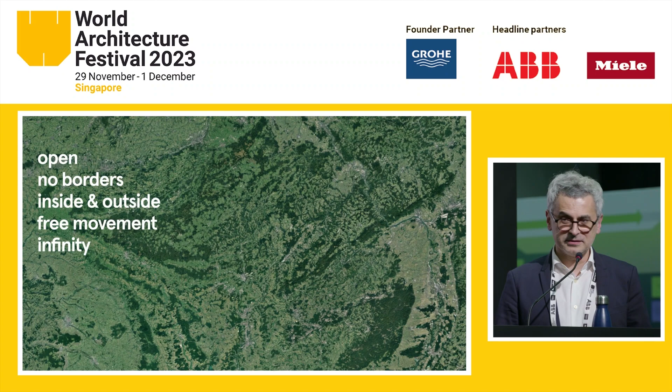And first, I wanted to speak about our little country, Luxembourg. There are no borders, there is no inside, outside, and there is a total freedom of movement. So that means that for our little architectural culture, there is no real identity or architectural identity. So the role of the architect is pretty complicated in Luxembourg, where we have to fight every time to explain the situation.

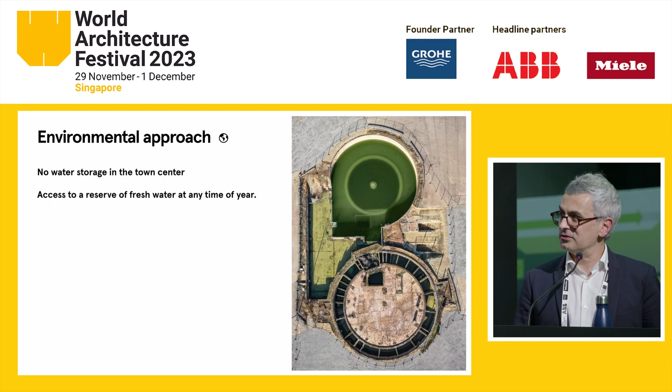So this competition was generated by the state of Luxembourg, and the idea was to think about a public square where we have in the middle of this future square an old infrastructural installation. And the aim was to get rid of this installation because nobody wants that. It's dangerous, it's a lot of concrete everywhere, and just think about how we can get rid of it.

And what we tried to do was completely the reverse. Say, okay, we have an interesting infrastructure, which is a part of our industrial heritage, and what if we keep it as it is and we build the square around this installation?

So with that solution, actually, we found out there are more than 5,000 cubic meters of concrete that we had to demolish first with a huge effort, and then to build another installation, maybe after 20 years, was not convenient anymore. And that's, again, the situation we are living every day as architects. So why not keep the existing and reuse it and give a new face and new life to the existing infrastructure?

So we put some huge pumps inside to get rid of water, because with our engineers we wanted to test the statical approach of the existing concrete, if it can work or not. And fortunately, everything was in very good shape, because it had been underwater for decades with no contact with oxygen, and everything is in super good shape.

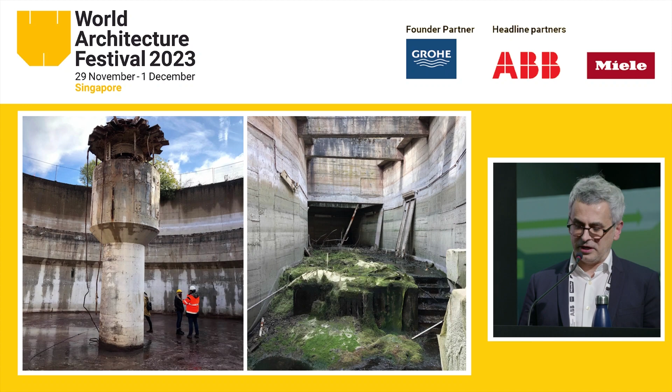So with that solution, we propose to keep the infrastructure as it is and to provide different layers regarding the needs of today. Maybe tomorrow we will change these layers and put new layers on, or put additional layers on the existing one. And we have a ramp which represents infinity. We have a restaurant, we have vegetation. Tomorrow maybe we would have another thing. But that was regarding the program of this competition, and that's the layers we proposed.

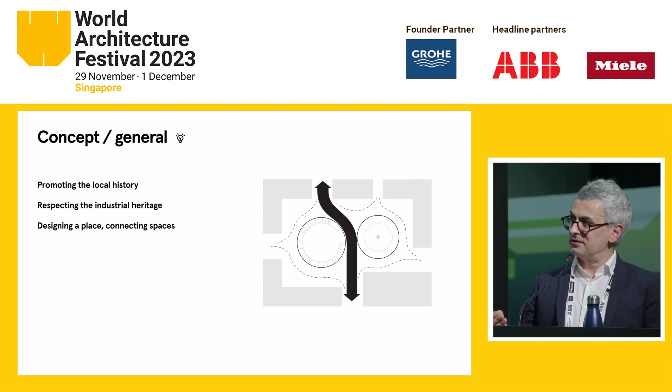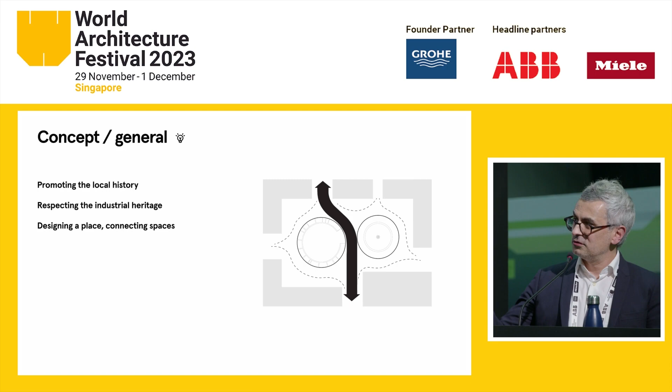So the square works actually very well with the flow and with the surrounding buildings. There is an interesting interaction. The visitors become actors, actually, while going up and down the ramp. And there is a democratic square, public square, where people can play music, where a child can play without taking any risk with the cars, because there is a difference of levels. And firefighters and deliveries have all access around these cylinders to the shops and to the apartments.

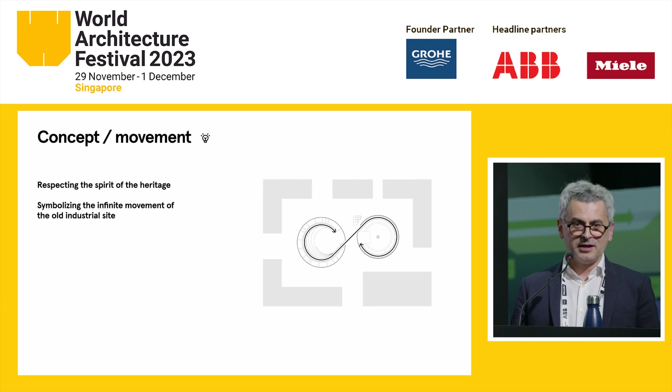And the coincidence was the ramp we proposed is exactly 200 meters long. That means if you are in the middle and your child is just running up and down, after 5 times you know that he ran 1 kilometer. So that was a coincidence.

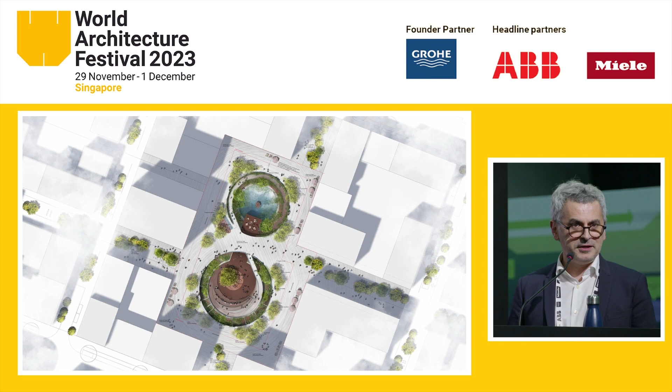We worked also with partners, landscape architects, to provide pioneer plantations, which are completely adapted to the topography and to the natural light. And this is how it should look in the 2 coming years. We already finished the stabilization works and stopped the site now because we are waiting until all surrounding buildings are finished. And once everything is finished, we come back to finish the square and the restaurant.

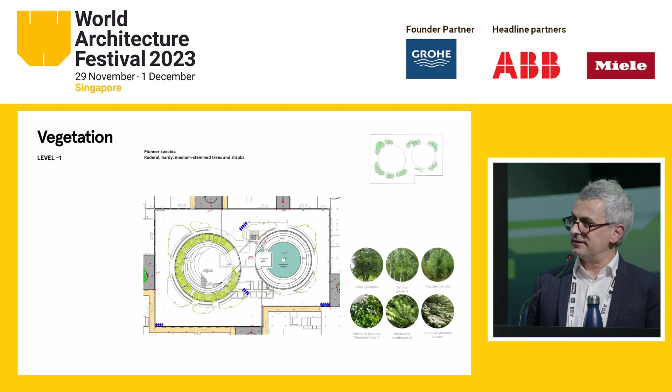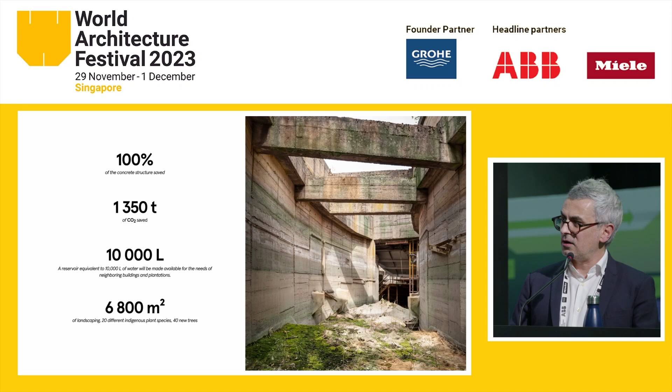So these are the different levels of plantation and different types. And there is a small mistake here. It's not 10,000 liters, but 10,000 cubic meters of water, which is a natural reservoir of natural water that we can use every day of the year for vegetation and also for the surrounding buildings.

So this is the final outcome. And there is also a little restaurant underneath because we didn't want to create any pavilion on the surface, because the surface is already saturated with a lot of information. And that's going to be a place to be in the south of Luxembourg.

And I don't know how to play the movie.

Yeah, this is the state now. We just finished the infrastructure for reinforcement of the structure and raising the level by 3 meters. And as you can see, there is always water there. And all around will be offices and housing buildings.

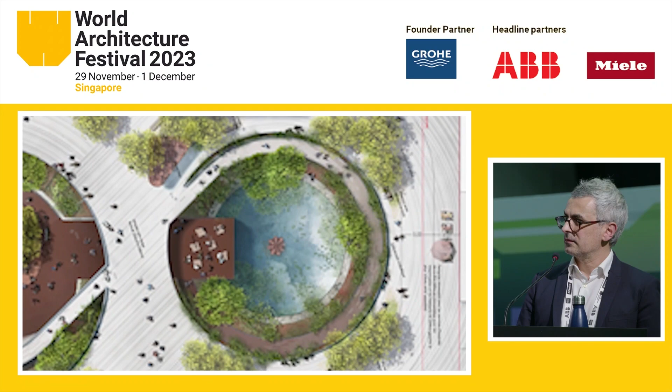And we're going to move on to our next category now, which is carbon and climate. And I'd like to ask Design and More to come and tell us about their winning project. Hi.

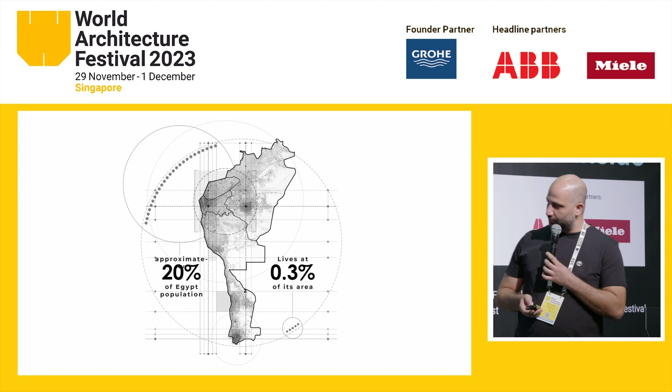So it started with the idea of really understanding the problem that most dense cities are facing, which comes from uncontrolled urban expansion. As you see here in Egypt, almost 20% of the population lives on 0.3% of the land, which makes some of the cities, like the big capital Cairo, very dense. But most importantly, you can see how the urban expansion into the green territory is affecting the context there. And this resulted from too much demand for buildings to accommodate more users.

I think the infrastructure is taking over the city. So this is one piece. It was 2014, now even the green areas have been replaced with infrastructure, mostly bridges and roads. The larger the city is, the greater the problem that we face. This is not only about Cairo. You can find it in Mumbai, in Mexico City, and everywhere. This happens when uncontrolled urbanity happens, and the cities become like a concrete jungle. And the city is even growing to eat the traditional area. There is no protection or border between the old city and the new city.

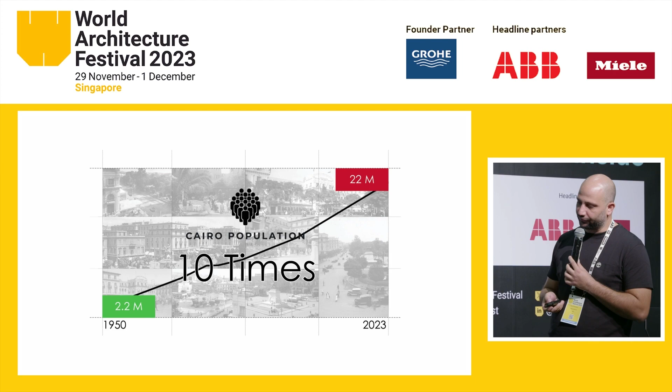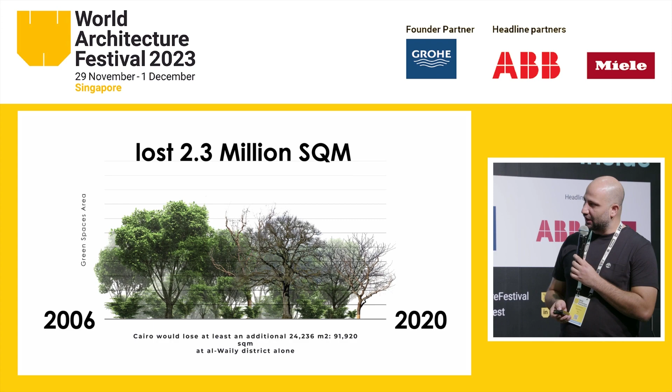However, this is another photo from the informal settlements in Cairo. And you can see here the percentage of greenery per person is getting less and less. And the city expands to become 10 times the population. And this is what the ending scenario will be: 1 tree for almost 50 or 100 citizens. All of these issues are not new, but I think we as architects should have a voice and try to use our voice and profession to reflect on these critical issues. But one of the sad situations is that only in the last 3 years, the amount of greenery removed was really big damage. And this affects the quality of life in such a city.

So learning from the informality, because I believe inside the informality there is an order, a hidden order we can learn from. And this is the self-organization, how the people really start to have this kind of awareness. They are planting the rooftops and cropping the plants, trying to be self-sufficient in a way. And also you can see on the skyline these kinds of towers the people constructed by themselves. So it was a real inspiration for how we can bring some greenery to the city.

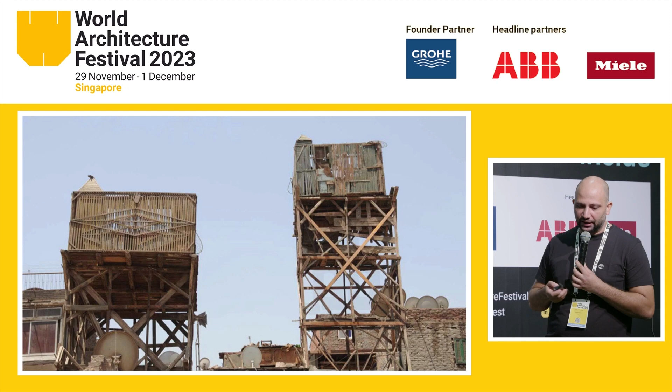As we're aware, we have a lot of buildings, and the least damage we can do to the city is actually not to build. I think this is one of the good acts that architects can do, not to build at all. But this is not the scenario. And the greenest building that can be utilized is the one which is already there, and we have millions of them. One of them was the water towers. And this is the kind of typical water tower that you can find in Cairo and also everywhere.

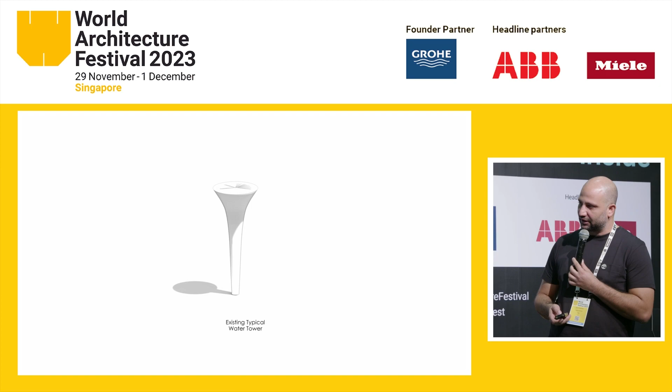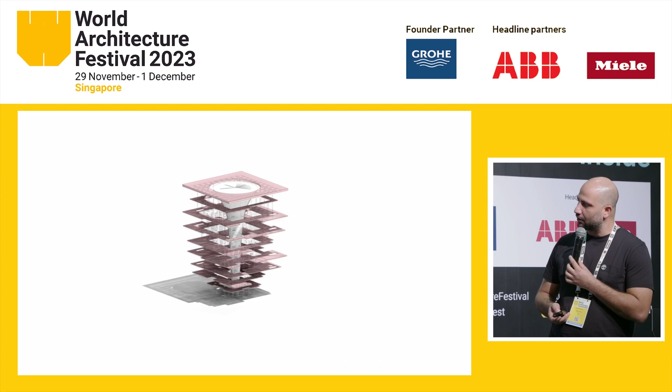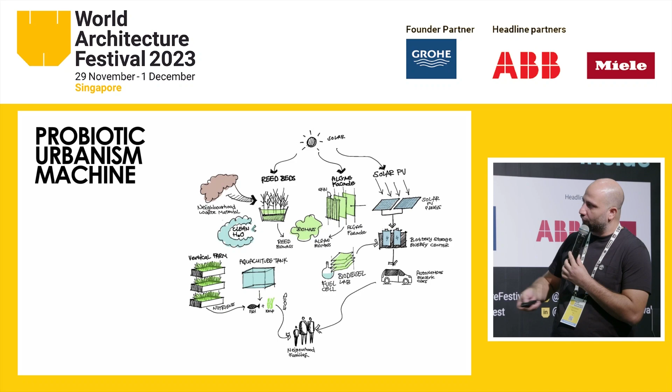And by giving this water tower a new life, as a structure for a new structure, we create this kind of urban machine by adding a temporary structure to it, and it will be repurposed as a social space, but most importantly as a green lung for the city. And it will create a vertical open space, and we call it a good cancer or a good bacteria in the city, to have these kinds of environmental solutions be like an acupuncture inside the city.

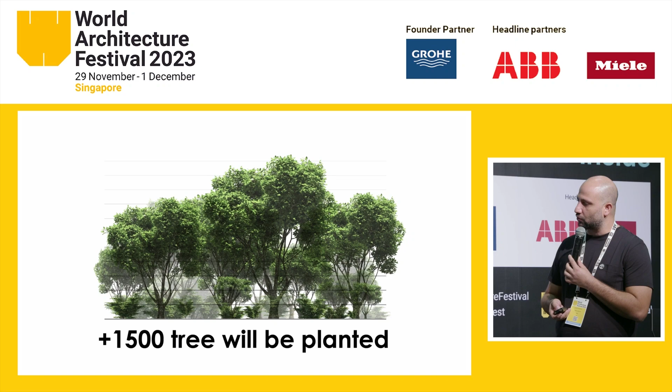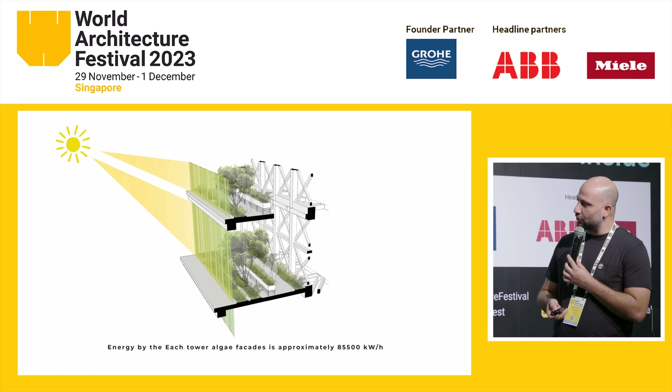So the act of the tower, it became completely different now. And as you see, it's like a very green machine that produces oxygen and also a vertical social space to the city. And by doing this, we increase the biomass by almost 3,000 square meters. It's already very environmentally adaptive, and the quality of the air and also the brise-soleil that's happening. So a lot of really studies that we did to check the quality of this.

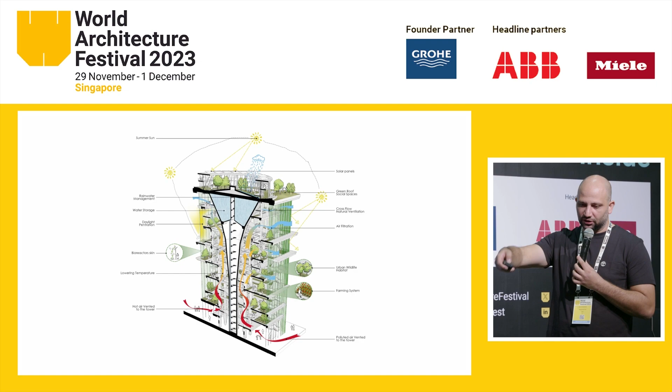So this is the idea of having a very dense green urban machine inside the city, and by repeating this in many places around the water towers, it creates a network of environmental system that grows by itself. And this is, we imagine the skyline, it will be this act, and it has also this kind of spiritual feeling inside the city that the people can go up and experience the city from the top.

And also it will be like a good imitation that other buildings can take from the tower, and the skyline of the city could be completely taken over by the greenery, using the top roof as an opportunity for social and gathering space around this greenery. And this is the facade. And I believe really by repurposing something that's already there, it's a good act and adding a new life to the city.

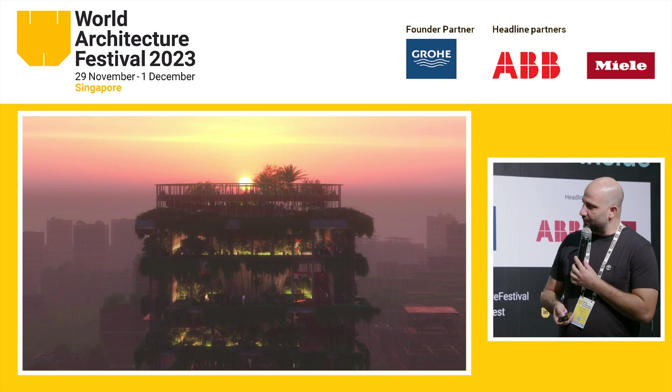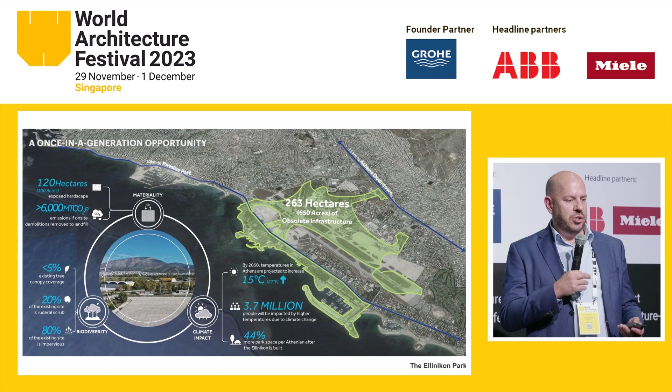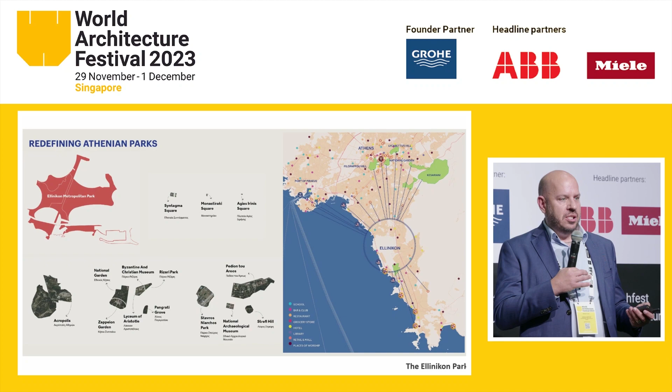So the decommissioning of the international airport in Athens in 2001 led to about 2 decades of trying to figure out a funding and governance mechanism for what to do with this site, which is about 263 hectares of obsolete infrastructure in the middle of downtown Athens. Now, Athens is a city that doesn't have a tradition of large recreational parks. If you look at the traditional landscapes in Athens, they're either very passive landscapes adjacent to ancient ruins, or they're hyper-urban streetscapes and plazas. This is the site as we began our work, which was a ton of obsolete infrastructure, a lot of concrete, and a very dense neighborhood that's been disconnected from the coastal front for generations because of this airport.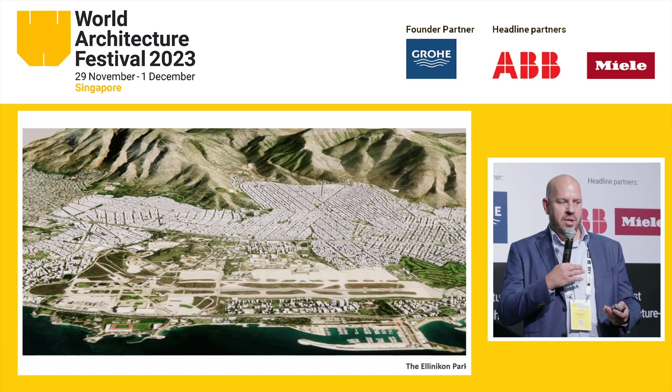What we imagined was a new civic park that's about 263 hectares, which is larger than Hyde Park in London and nearly the size of Central Park in New York, that would serve as a new central park for all of Athens, alleviating development pressure from the historic city core, and creating a new center of gravity near the ocean front for the city.

Now, when we think of landscape architecture, we think it's an inherently sustainable profession. But the reality is every act of construction, transportation, every tree we plant, every material we use has an impact on carbon. We're just as culpable as any other design profession when it comes to generating carbon in the landscape. When we look at things like moving soil, planting trees, choosing materials, all of these things have an impact on what we need to think about in terms of carbon.

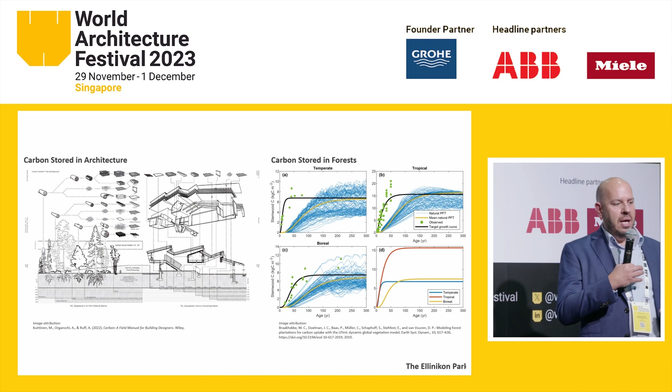And it's complicated. When we began our work, we were overwhelmed looking at different carbon calculators out there, which were very focused on architecture and materiality, but weren't considering the entire life cycle and certainly weren't looking at the impacts of landscape architecture on carbon. So we basically had to invent our own carbon calculator. We call it Carbon Conscience. It's the largest database that merges engineering, architectural, and landscape data sets together into one. Most importantly, we've made it free for everyone to use.

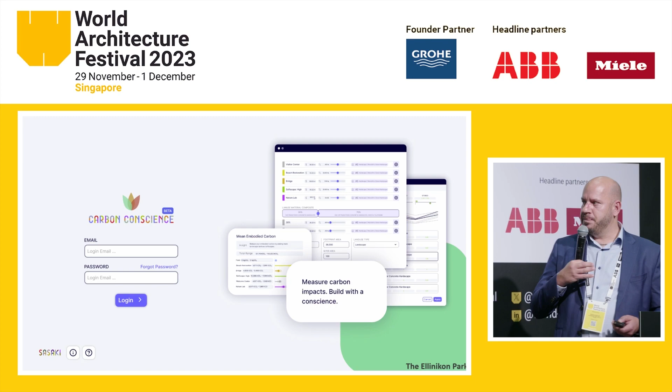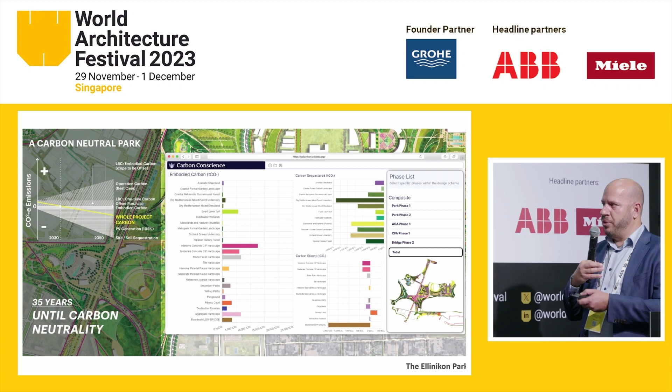We've also gamified the system so that you can input nearly every material available out there in the marketplace. We went through EPDs for almost every single product that was out there. We worked with various companies, and we have a database of over 3,000 materials and inputs that you can look at. And again, we've gamified the system, making it easier for you to make carbon decisions in every act of design throughout the

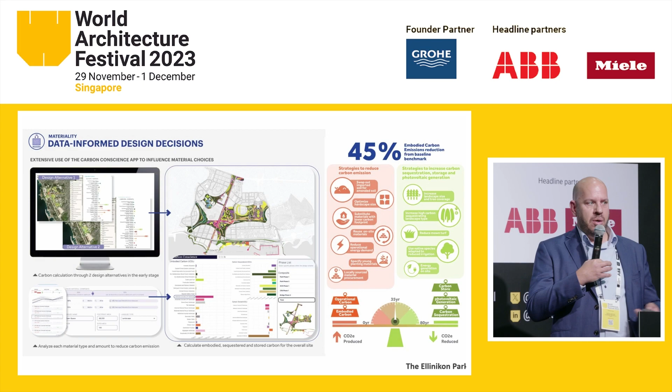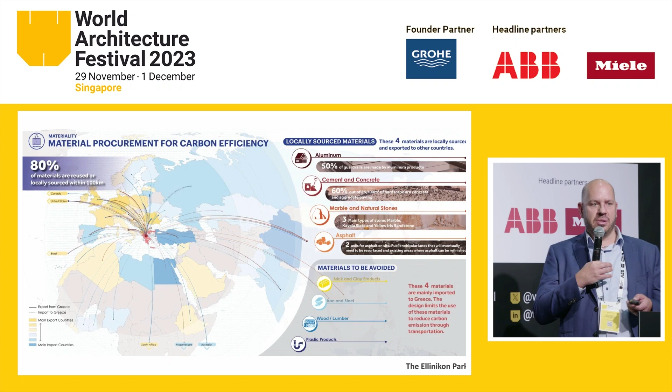entire process. What we learned is that the best decisions are made in early concept and schematic design phases, especially when it comes to landscape. That's when you're making big decisions around how to use softscape versus hardscape, what land uses are, what your material choices might be. That led to us doing a significant amount of material research specific to Greece. We looked at what was available in the country, what existing materials were in the country, and reducing the amount of materials that would have to be imported from elsewhere.

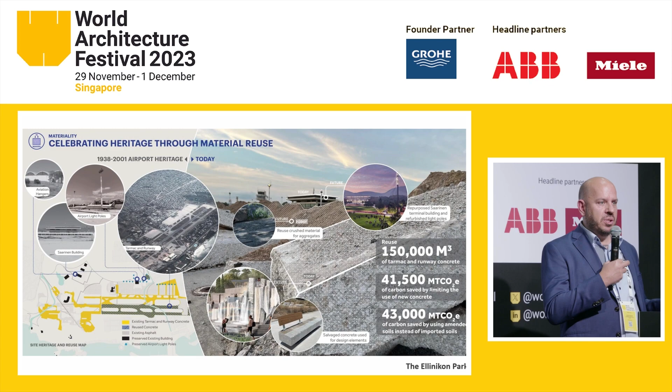The biggest decision we made was to essentially mine the site. We had over 150,000 cubic meters of existing concrete without any rebar in these existing airport runways and tarmacs. An incredible resource that could be reused for almost everything within the park. You can see it here in Olympic Square, which is the main gathering place within the park, the main civic plaza. Every single material here is reused from the existing site.

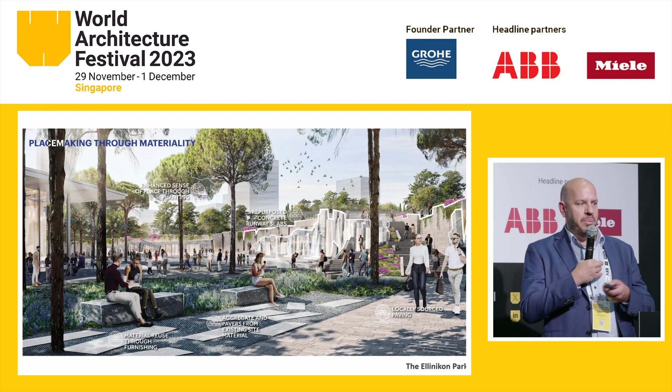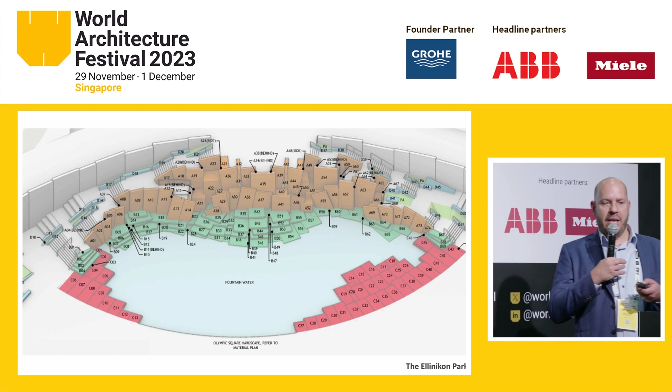We could have made these fountains out of limestone or marble, granite, all of which are plentiful in Greece. Instead, these are sandblasted concrete directly mined from the runways of the existing site. They're also beautiful. These have quartzite and marble aggregate within them, the size of golf balls. Again, no rebar. The finished result is much more like a terrazzo than any other kind of concrete material I've seen before. And we've made it ubiquitous.

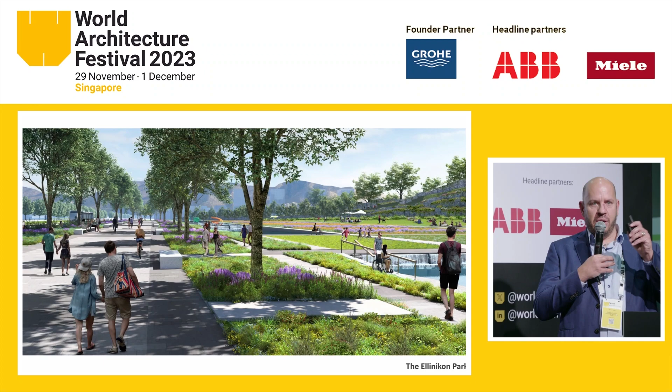It's throughout the park. Everything from the signature fountain to benches and paving to the unseen, crushing it and using it for subbase underneath plazas and pathways. So every material that we have from the site is reused. We have large slabs that create the new sculptural hill, which recall the Acropolis. It's a 35-meter high hill that has incredible views to the Acropolis in Athens to make those visual connections. We use it within planting areas, within paving areas. And again, this is a very beautiful material.

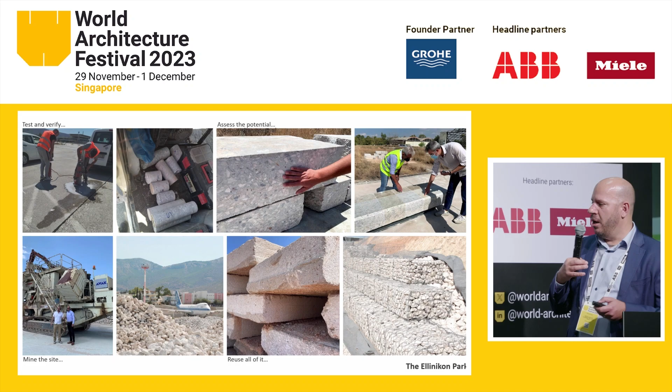We needed to test and verify. We needed to assess the potential of these different types of concrete throughout the entire runway system, and then quantify it and categorize it for how it might be used throughout the park, from mining it as huge slabs that are 3 by 5 meters in size, all the way down to, again, crushing it, using it for things like gabion walls within the park.

Beyond the runways, we also had adaptive use of great existing architecture. Athens was one of only 3 airports in the world designed by Eero Saarinen, the other 2 being Washington Dulles and the TWA terminal at JFK. So what we did was reuse this building as a conference and cultural center with a grand event space that terraces down to the sea.

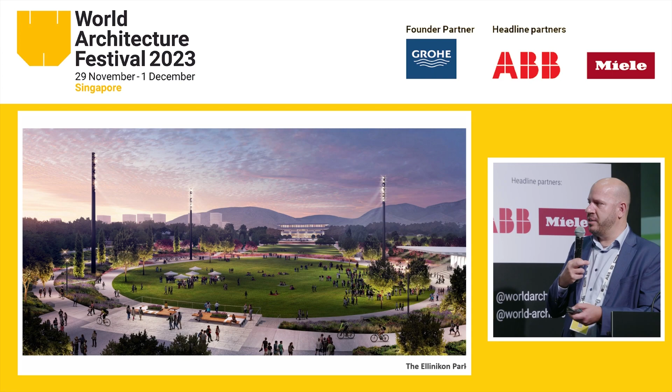What Carbon Conscience also taught us was the importance of ecology and understanding different ecologies and how they could impact carbon as well. Everything from tree planting, overstory, understory, all the way to soil biology as well. And we looked at what kind of existing ecology was in Greece, everything from the dry mountain landscape to the maquis shrubland, leading down to the coastal landscape of the Saronic Gulf, and making sure that the entire park is a restoration landscape based on native materials, native plants, and native seed mixes.

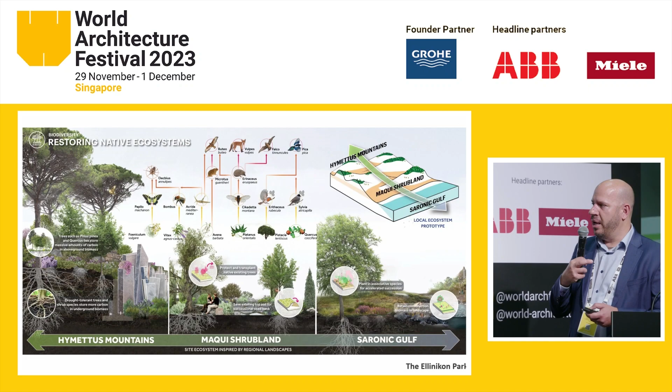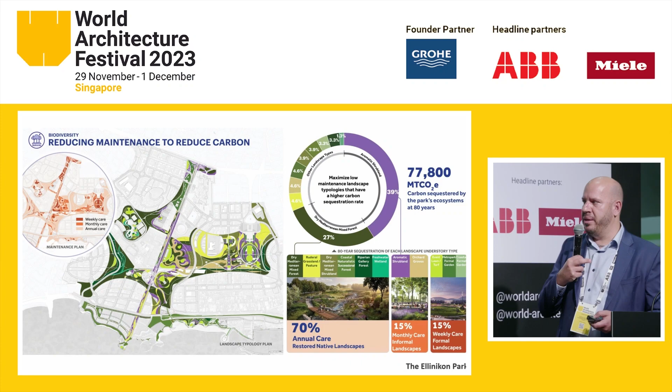What that led to was 70% of the park being an emergent landscape of entirely restoration ecology that doesn't require any monthly or weekly care. This is all simple annual care of 70% of the landscape. Only 30% in those high-touch human areas require monthly maintenance. So we've really limited the amount of operations and maintenance required in the park as well, which helps to reduce

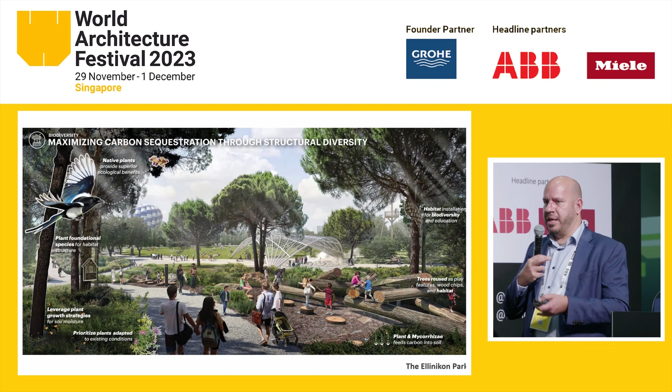carbon. We use in situ tree preservation, and trees removed from the site of non-native species are used as play areas and as places that can decompose and help soil biology as well. So again, every single material from the man-made to the natural was reused throughout the entire park.

With 3.3 million plants to procure for the site, we also had to work with every single nursery in Greece to get those plants. Beyond just using the native species, we also worked with them to forage for native seed mixes and actually created the first native seed mix in Greece, which is now being used by all of the nurseries throughout the country. So in that way, we've shifted the needle.

All of the irrigation for the park, from the fountains to ponds and lakes to irrigation and misters, comes from an existing wastewater treatment plant treated to a tertiary level.

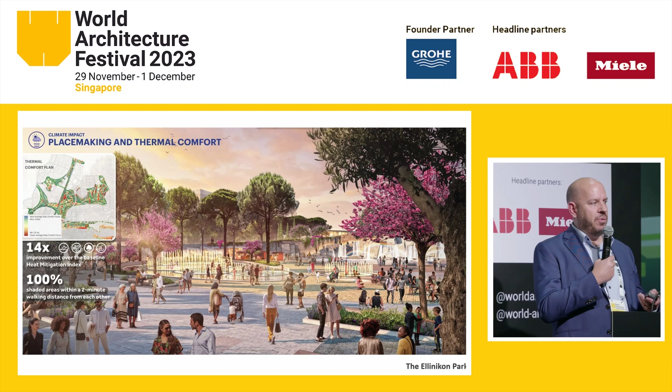So we're not using any potable water within the park. All of that's being reclaimed. And this is the largest green infrastructure project in Greece because of that. All of that water also helps to improve thermal comfort in some of those high human touch spaces as well.

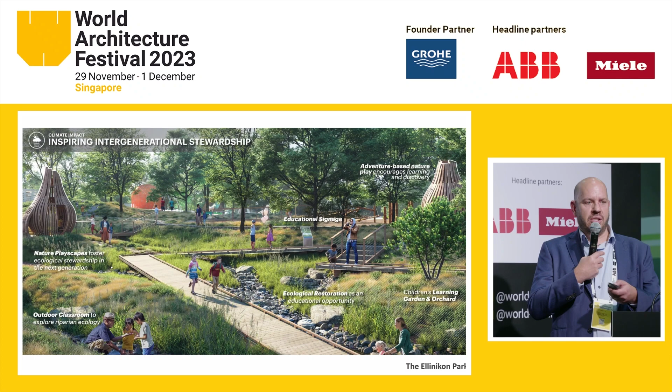We also included nature play in how the education of the park can teach lessons to children about the ecology of the park. We have 4 destination playgrounds throughout the park, all themed based on either nature zones or a cultural reference or the history of the site, such as aviation, maritime, and agriculture. Even for the littlest kids, there are play areas like this one, which has this wonderful owl, the owl being the symbol of Athens because of its references to the goddess Athena.

So all of these cultural references, again made from reclaimed wood within the park, kind of hearken back to telling the cultural story of place.

We also have a huge agricultural zone within the park. Before, the entire site was an airport, which was built in 1938. It was fertile agricultural land. So we're bringing that back by teaching children how to till soil and work with the soil. We're also using all of that as a productive landscape where different types of crops grown on site are being used throughout the park's restaurants and cafes.

In addition to the core of the park, we also have a 2-kilometer coastal front area, which will become the largest public beach in the city of Athens.

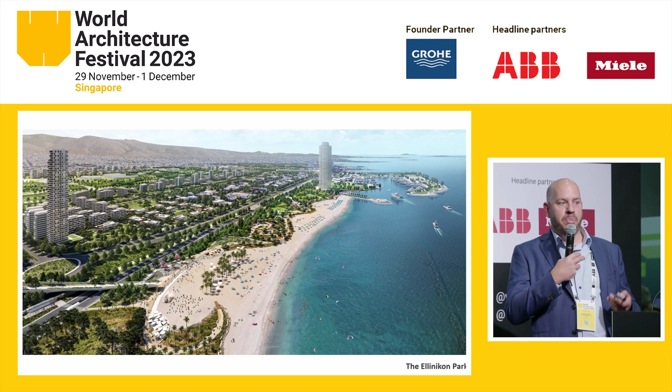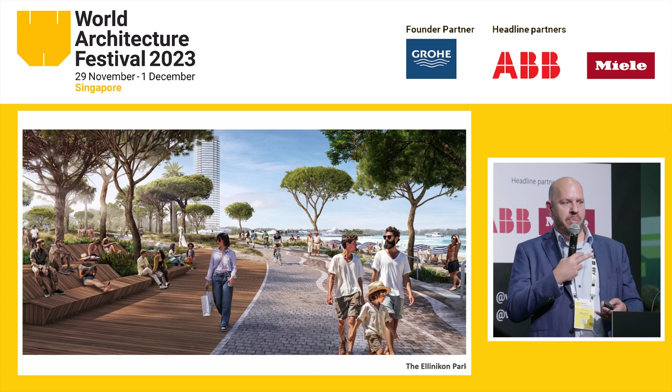Again, we're using reclaimed material. At the coastal front, we don't have a single piece of steel or concrete. Every bit of material is natural, and most of it is reclaimed from the site itself. So you can see here, without using any steel or concrete within the entire park, we've also created a coastline of endemic species that teach about the native landscape.

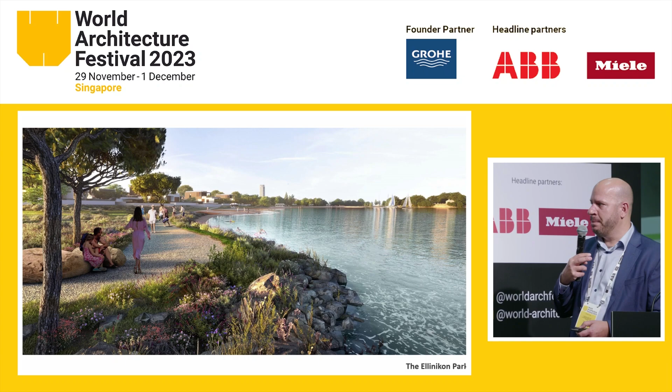Beyond the design and the embodied carbon, we also looked at operational carbon, which was very important to us. And what Carbon Conscious allowed us to do was, through an operations and maintenance plan, size a solar array that would allow for the entire park to be operational carbon net zero on the day that it opens in 2026.

So with that, what we're trying to do is reignite an ethos of appreciation for landscape and culture in a new 21st century carbon forward concept that prioritizes access for all Athenians. Thank you.

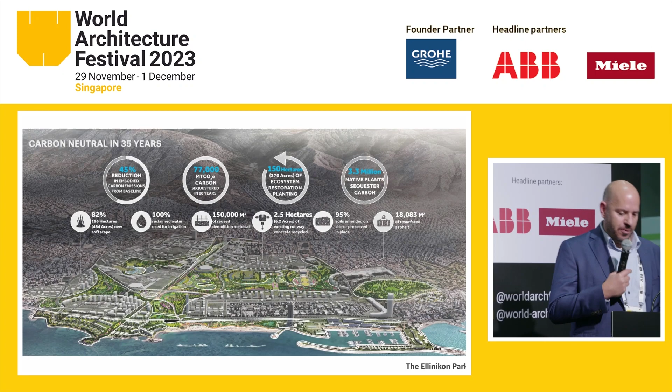Thank you so much. What a great presentation. What an amazing thing to do with a redundant airport, from carbon to greenery. We're moving on. There'll be a discussion amongst the 3 presentations of this category after this next one, which is by ARUP.

For the second time this afternoon. Congratulations. Welcome again. Thank you. Thank you very much.

Good afternoon, everyone. My name is Marco Mugnai. I'm an associate architect at ARUP, and I'm here to present our Taikoo Green Rainbow project.

So just a little bit of background. This is a project that won a competition organized by the Hong Kong Green Building Council with Swire Properties as a principal partner. Swire Properties is also the owner of the site where the project is based.

Objectives of the project were to generate innovative ideas and solutions to push the boundaries of and advance net zero emission by 2050. 2050 is an important number here because some of the technologies we see in this building are being developed as we speak, and will be fully available possibly by 2030 and definitely by 2050.

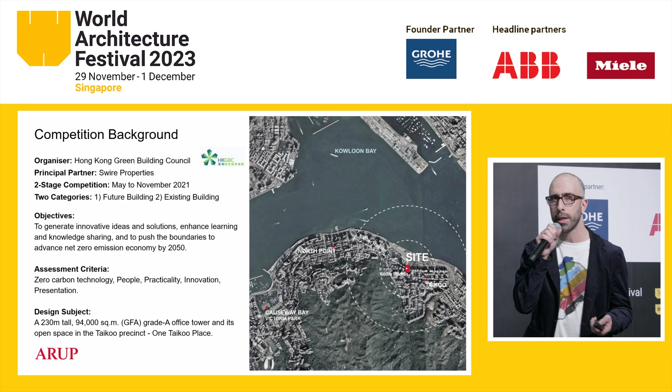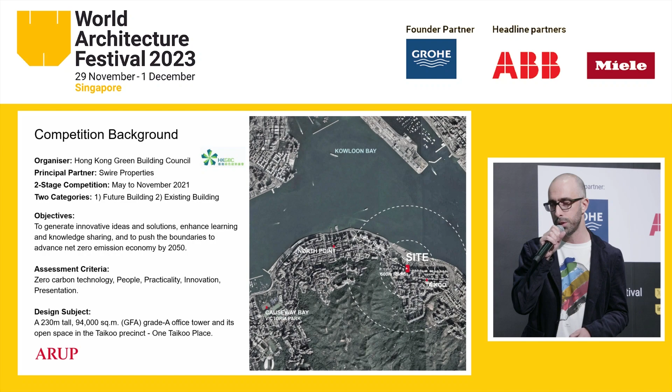Assessment criteria, of course, were zero carbon technologies and people, creating a space for the people for the city of Hong Kong. The design subject is a 230-meter tall, 94,000 square meter office tower in the Taikoo precinct in Hong Kong.

So this is our starting point, our manifesto. Our building goes beyond being net zero and carbon neutral. You will see from the design solutions it's much more than that. It's forward-looking, responsive, and nature-driven. Nature-driven, I think, is the key, because we really bring nature into the building as a distinctive design element. And we create a new urban ecosystem, a new space, a new part of the city. This is really connected to the city of Hong Kong, made for the people.

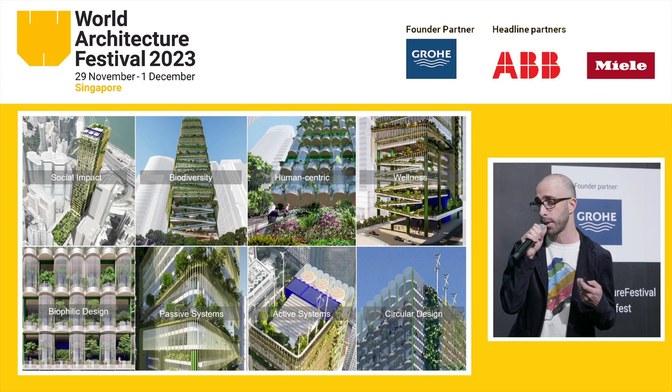So how do we put together this inspiration, these design points? So let's start from the form. The form is very distinctive.

We have a core on the south side that drives all the connection vertically within the building, which allows us to free the building completely on the north, east, and west facade. And so we can create fully free floor plans that will allow us also to have natural ventilation.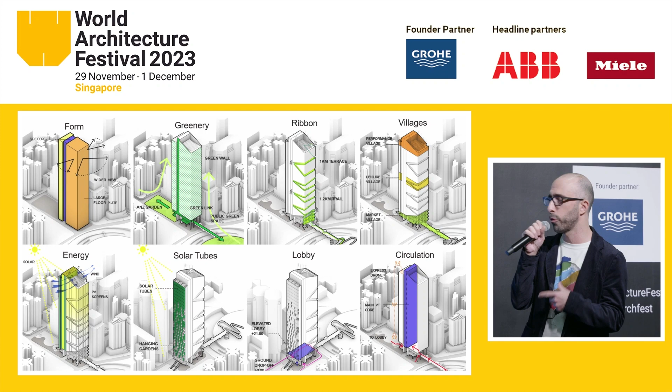And we have greenery all along the building, full height. So we have green walls on the side, east and west, and also along the ribbon.

The ribbon is this element. It's a 1.2 kilometer long path which runs from the ground level up to the terrace of the building. It's a public space within a private building.

And this ribbon connects these villages, as we call them - we have 3 of them, 3 episodes within the building height. At the ground level, we have the market village, a public space connected to the city and the parks. In the middle of the building, we have the leisure villages, where we have food and beverage, gym space, and cultural spaces.

And at the top, we have the performance village, which is a rooftop theater, partly green roof.

Then energy. Energy is the key if you want to get to a net zero building. We need to make the best use possible of wind energy. We have wind turbines on the roof, solar panels, and green walls to create energy within the building.

And then we have the creation of this solar tubes facade on the south side, which is extremely interesting, and it allows us to use all the south surface of the building to collect solar power.

The lobby at the lower level is still a semi-public space, and the circulation, as I said, happens in the south side core vertically throughout the building.

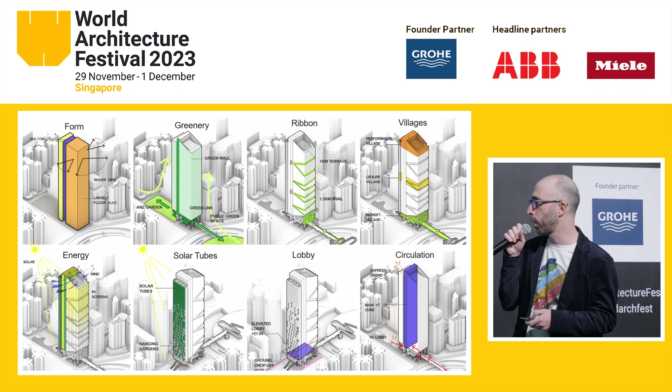So a few elements on how we bring biophilic design into the building. Obviously, landscape features - that's the key. We bring the landscape everywhere in the building.

Natural lighting, I'd say most of the building is naturally lit. We have connection to nature via orientation and interior floor plan. And natural ventilation is also a key element of biophilic design.

And also adoption of natural materials throughout the building. So let's start from the ground floor plan. You can see this is a park, actually, just a park with a connection to the building. So the building starts in an elevated position.

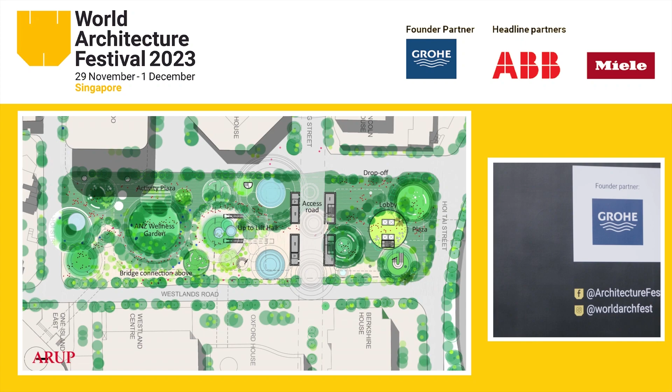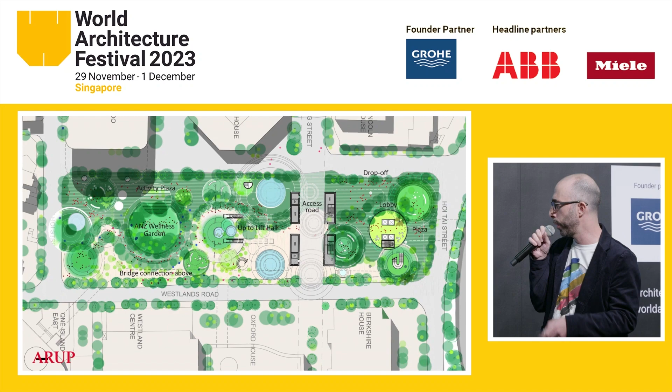We have here 4 cores surrounding an access road, and 2 escalators that bring you up to the lobby. So your first contact with the building is to a green space, these green ripples, and these water features that are also using rainwater. We also have 2 stories below ground car park.

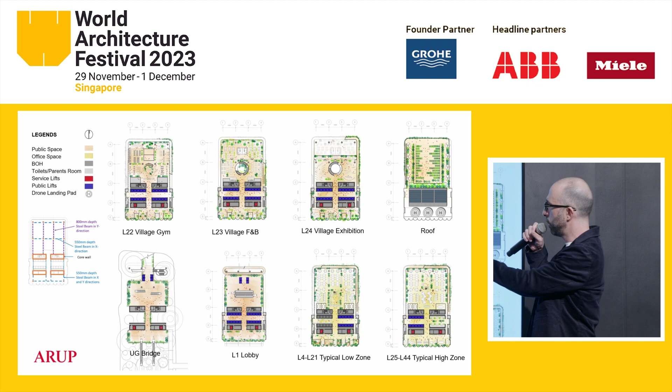You can see here the elevated lobby with a bridge connecting to the park just across the highway, the lobby at level 1, and then different types of office layouts, all possible because of the large spanning structure and the free facade on 3 sides, north, east and west.

We have more than 40 different elements across the building in terms of passive and active design, user strategies, carbon management, and renewable energies. It's all these things together that give us a net zero carbon building. It's not just one thing. We need all these things at once.

Looking at the building in elevation, as an exploded volume, we can see these different episodes: the villages, the lobby at ground level, the garden at the bottom ground floor, then the gym, food and beverage, and exhibition space at the center, and the infinite theater on the roof with helipads for vertical landing vehicles. In between are all these office spaces with a flexible floor plan.

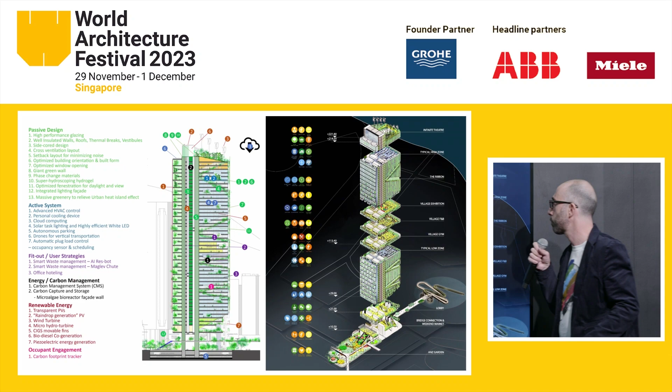This is the solar tube facade to the south, and the ribbon is connecting everything from ground to the roof.

This is a view of the ground level. You can see how this is a completely open space. This is really a part of the city, not a traditional office building that's secluded and isolated from the life of the city. We want to bring the city within the building. Here we created these market spaces.

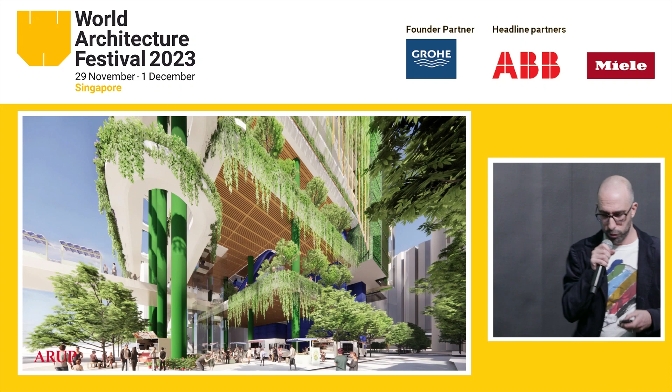You can see how the greenery is pretty much everywhere, and this timber ceiling uses recycled timber from the Hong Kong construction industry. Then moving up in the villages in the middle of the building, where we have herb gardens, gym spaces, collective spaces, and once again recycled timber in the ceiling.

As I said before, the building is entirely naturally ventilated for most part, especially in the office space. This is possible by using artificial intelligence, which is constantly monitoring temperature and solar radiation throughout the building, so that the facade can be opened and closed in real time as needed to keep the temperature as desired within the office spaces.

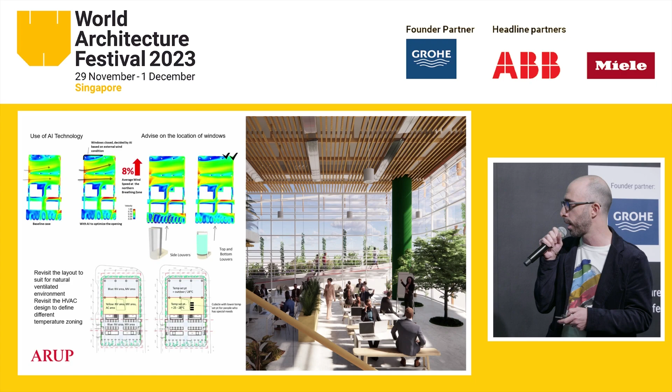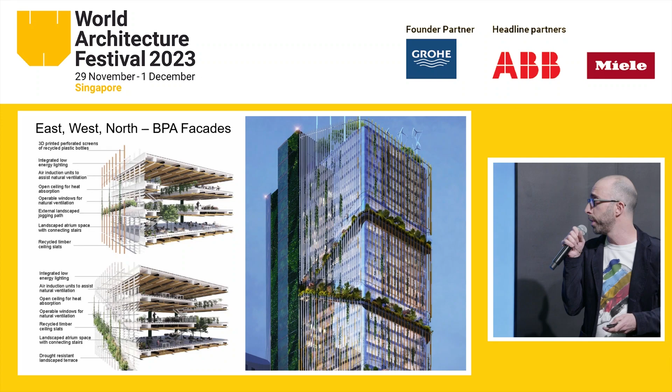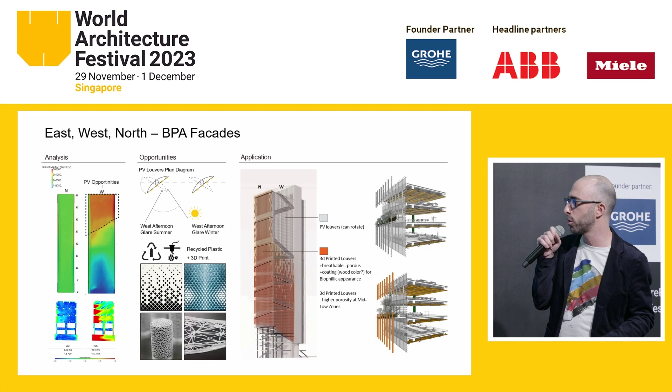And then we get up to the roof. We did solar radiation analysis that defines the distribution of solar panels and opaque blades throughout the facade, and also the use of solar tubes made of photovoltaic curved glass panels. They collect solar energy on the south side, and become hanging gardens lower down where there's less sun radiation. They can be prefabricated, assembled on site with different functions: meeting rooms, cafes, gym, hanging garden.

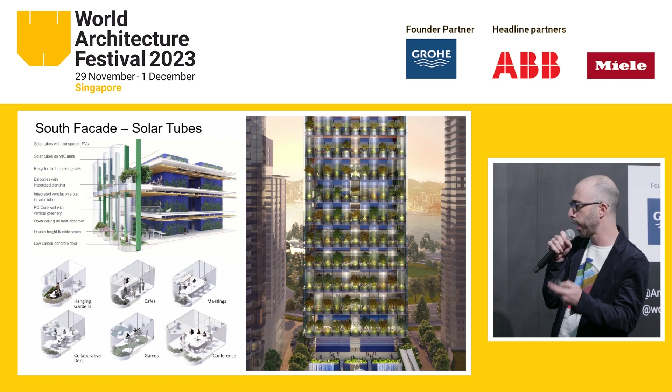So this is the concept, the vision. This is also part of the climate change framework for built environment in the city of Hong Kong.

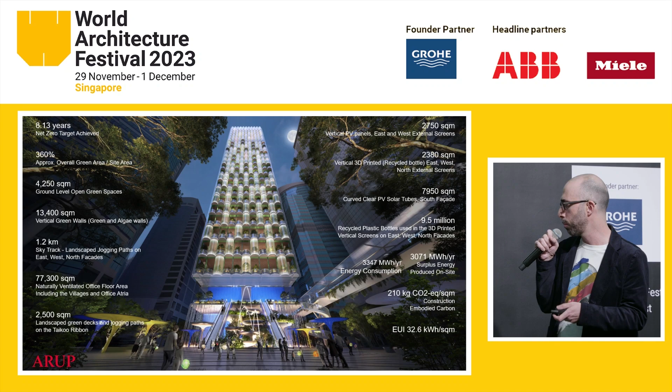Quickly, to finish, a few numbers, actually a lot of numbers, and I apologize for that. I just want to say that the building achieved the net zero target below 9 years—after 8 years from its construction, it's going to be net zero. Also, the building produces more energy than it consumes: it consumes 3,300 megawatt hours per year, and produces on top of that, so it's self-sufficient but also energy generative, 3,000 more megawatt hours per year. Thank you.